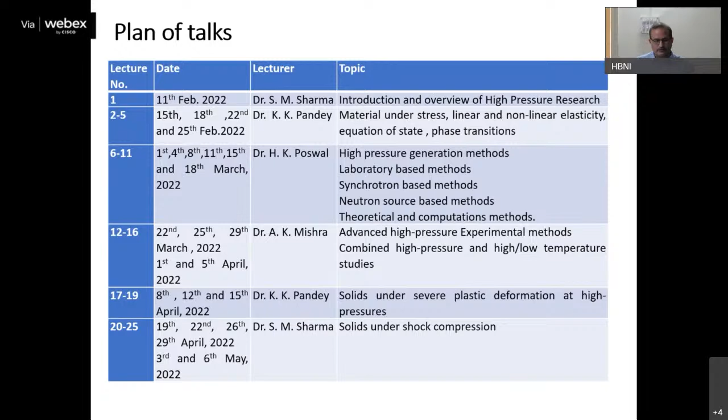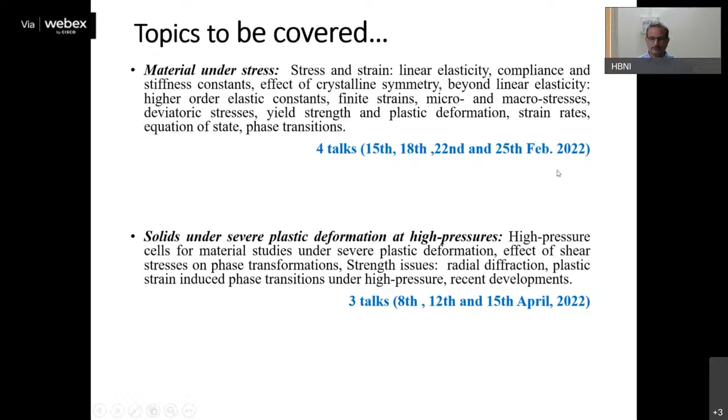So the topics that I will be covering, basically, will first be the basics about material under stress. In this, I will introduce what is stress strain tensor, what is pressure in solids. I will talk about linear elasticity, compliance and stiffness constants, and the effect of crystalline symmetry on this compliance and stiffness constants matrix. Then I will talk about nonlinear elasticity, equation of state, and phase transformations. In my second part of the talks, I will cover solids under severe plastic deformations at high pressures. Today's talk will be up to nonlinear elasticity.

I will keep my talk at a very elementary and basic level for the benefit of young researchers. So I will start with the definition of pressure in fluids, and then what happens when we go to solid systems - what is deformation in solids, what is linear elasticity, then define stress and strain tensors. Then I will talk about stiffness and compliance matrix, the effect of crystalline symmetry, and then how to get information about pressure from the stress tensor, and a little introduction about plastic deformation, which will be discussed in more detail in the second part of my talks. Finally, I will give a brief introduction to nonlinear elasticity. Of course, this nonlinear elasticity is a subject in itself, very broad, so I will just cover some introduction.

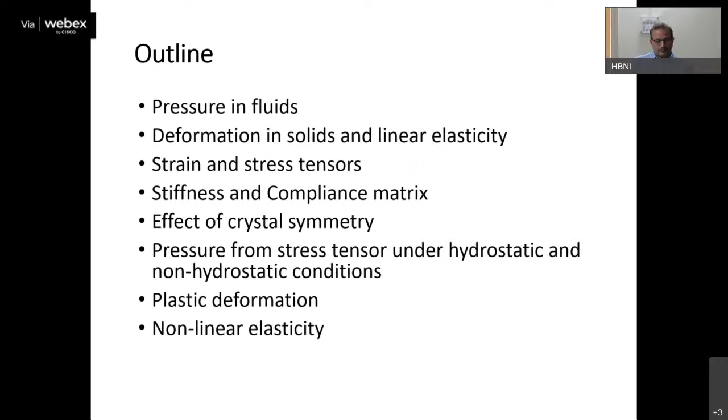Okay, let us come first to pressure - how pressure in fluids is defined. We have been learning from very elementary levels that pressure is defined as force per unit area. So how does this definition come into picture? Actually, this comes into picture from fluids or gases, basically. If you go to the microscopic level understanding of fluids, you can consider the microscopic.

There are many microscopic entities in the gas - atoms or molecules - and they are basically constantly colliding at the surface of the container, imparting some momentum, so basically transferring momentum all the time. It is momentum transfer to the walls of the container divided by the area of the container walls. So this is how pressure is defined. And here, if you notice, I have put N here, which means all these forces are basically normal to the surface, because in the case of fluids, there are no shear stresses, as it does not have any shear strength. That's why the basic definition of pressure comes from fluids.

And this is something which is also used commonly in hydraulic presses, where we can apply small force and use fluids to basically magnify the force by increasing the area. Now, what happens in the case of solids? If I take a fluid, at all temperatures there will be some pressure. I have to go to either 0 K, or I have to increase the volume to infinity in order to make pressure 0.

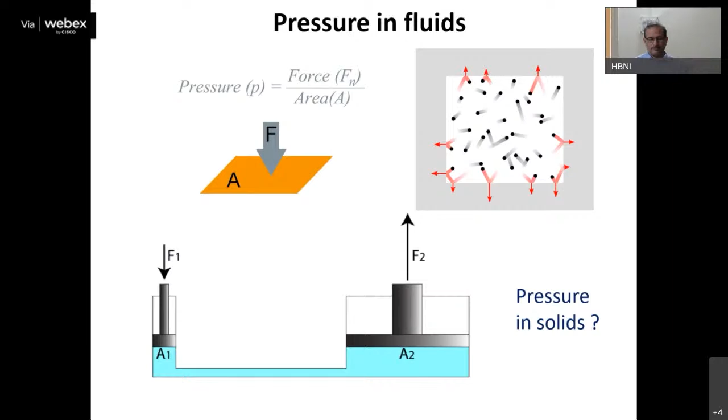In the case of solids, there are interactions between the microscopic entities, which can be molecules or atoms. Because of this interaction, there is some mean position about which the system is in equilibrium. We can understand this by a spring model, basically.

Just consider a spring and a mass attached to a spring. When it is in equilibrium condition and you apply no force, the system is static, it does not change position. But as soon as you apply force on this mass and compress or elongate the spring, there is some restoring force that tries to bring the mass back to the equilibrium position. This is something similar to what happens in case of solids also.

This is a 2D representation of a solid lattice, where you can consider all these atoms connected by springs. You can imagine a 3D network also, similar to this 2D network, where all atoms are sitting at some fixed positions, which are connected by springs. So at any time, they are at equilibrium position.

Actually, at any time, there is some temperature also. So ideally, these atoms are not sitting just at their equilibrium position. They are actually vibrating about the mean position. But these vibrations are very small.

So the potential faced by each atom can be described by this kind of curve, which has a very steep rise as you go below the equilibrium distance, and it again increases if you go above the equilibrium distance. This is the equilibrium distance, and at the equilibrium distance, you can approximate this potential as harmonic potential.

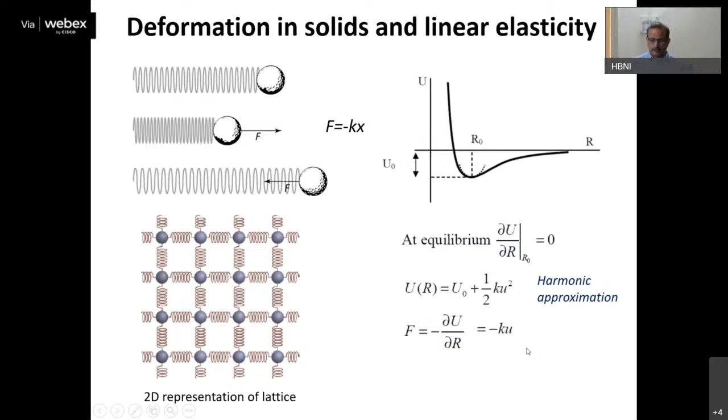Now, in case of solids, it is not only the normal force which acts on the surface, but because solids also have some shear strength, even if you apply tangential force, it also has a response. So now instead of expressing this displacement as a scalar or vector quantity, you need a tensor quantity to describe these displacements.

For example, if you have some body in space, and if you want to deform it, you need to apply some external mechanical force on this body. As soon as you apply this external force, there is some response force from within the material that tries to oppose whatever external force you applied. But before reaching equilibrium, it also deforms.

So there are some strains developed in the system and some stresses developed. Strain and stress are basically tensor quantities, and they evolve in the system as you work on it by some external means. This is a representation of the strain tensor. You can see there will be 9 components in this tensor because we are in a 3-dimensional space.

By convention, this tensor is defined such that the first index corresponds to the direction normal to the surface, and the second index corresponds to the direction of the displacement in case of the strain tensor.

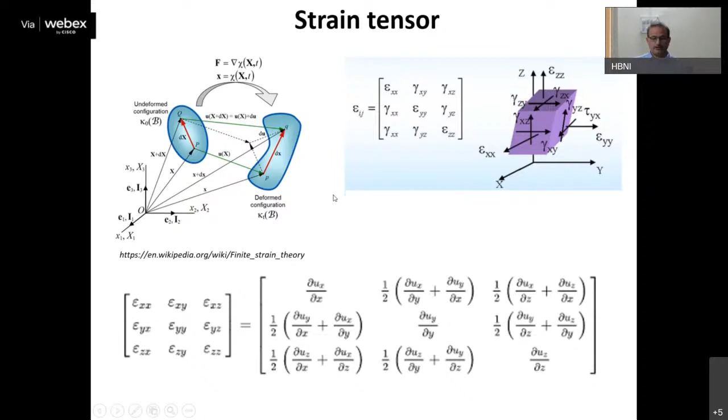Similar to the strain tensor, there is a stress tensor that evolves in the system, which opposes the external applied force. Like the strain tensor, the stress tensor is also a field described all over the sample. You can consider a small volume element, and the convention is the same: the first index describes the orientation of the surface, meaning the normal direction to the surface, and the second index corresponds to the direction of the force.

If I and J are the same, these are the diagonal components, corresponding to the normal stresses on the surface of the volume element. The off-diagonal elements correspond to the shear stresses. For example, sigma xy means the normal of the plane is in the x direction, and the force is acting in the y direction.

You can define all these stress components by these relations, where delta Fx is the force on the surface and delta Ax is the area of the surface, taking the limit where the area tends to zero. But the volume of this element should still be such that the system represents a continuum.

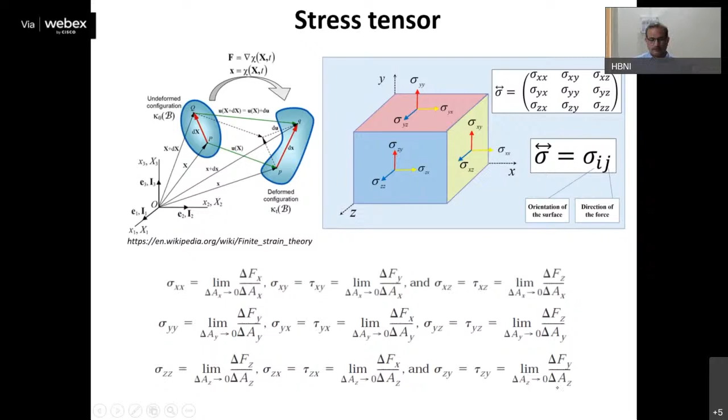Now let us talk about the symmetry of the stress and strain tensors. As I mentioned, we are interested in studying the deformation of the system, and this necessitates that the off-diagonal elements should be equal.

For example, if you take a two-dimensional cross-section of the surface and compare the stress components sigma xy and sigma yx, they act in this way and must be equal. If they are not equal, the volume element will rotate, corresponding to a change in angular momentum. So to conserve angular momentum, avoid rotation, and purely describe the deformation of the system, these components have to be equal.

So what does this mean? Instead of 9 components, now there are only 6 components: 3 diagonal components and 3 off-diagonal components.

In the same way, the elastic strain is expressed like this, where u is the displacement and x is the coordinates in the deformed configuration. This is how the elastic strain components are related to this deformation.

Here again, in order to describe only the deformation and not the rotation, this has to be symmetric. From this relation itself, you can see it is defined in such a way that it is symmetric. So like the stress tensor, the strain tensor is also symmetric — only 6 components for the stress tensor and 6 components for the strain tensor.

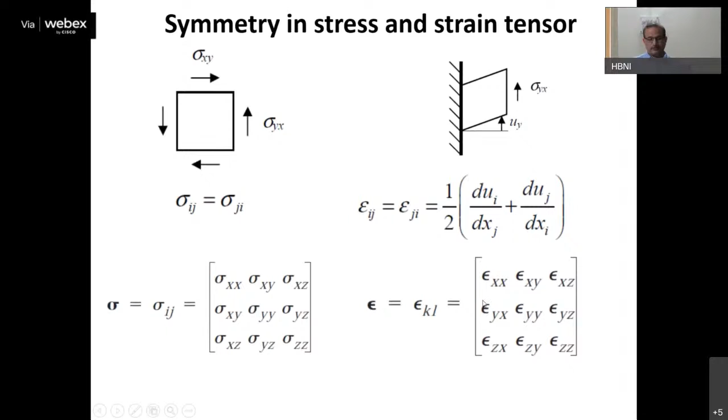Now let's come to the relationship between the stress tensor and strain tensor. As I mentioned, we are talking about linear elasticity, where we are very close to the harmonic approximation, and the deformations are very small. So the stress and strain tensors are linearly related, connected by some constants that we call elastic constants.

The stress tensor is a second rank tensor, and so is the strain tensor. So the elastic constant becomes a fourth rank tensor, and the total number of components in this tensor should be 81.

But now let us invoke the symmetry considerations of the stress and strain tensors. As mentioned, there are 6 independent stress components and strain components. So instead of writing in matrix form, we can describe stress and strain as vectors — these are the 6 independent components of the stress tensor, and these are the 6 independent components of the strain tensor, written by convention in this order.

First you take all 3 diagonal components, then you go this way: sigma yz, then sigma xz, and sigma xy. This is how it is expressed, and in the same way you also express the strain tensor.

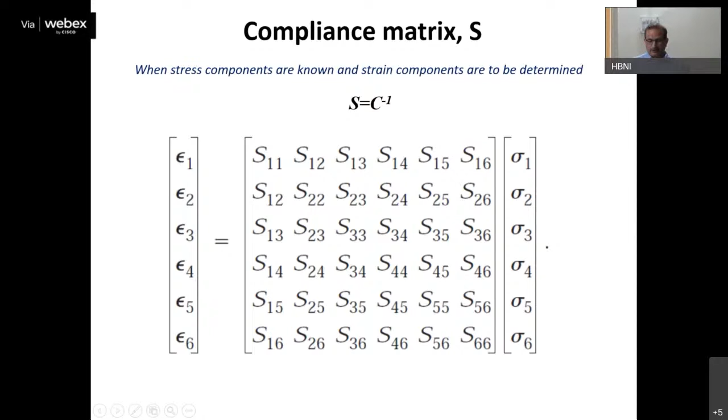Now let us talk about the symmetry effect of crystalline symmetry on this stiffness matrix. For example, let us take the cubic system. As we know, in a cubic system, it is symmetric in all x, y, and z directions. So the response of the material should be the same along x, y, and z. So all these components have to be same. Again, because it is symmetric, all the shear components, the response in the shear direction will also be same. So all these three, because this is symmetric, can be represented by the same elastic constants.

One thing I missed in the stiffness matrix: if you divide this matrix into 4 parts, this upper corner part basically relates only the normal stresses to the normal strains, so this part corresponds to only compression. Whereas this part relates the shear stresses to shear strains, so this part relates to only shear elastic constants. This part and this part relate the shear stresses to normal strains, or normal stresses to shear strain, so this part corresponds to the mixed state where there is a coupling between compression and shear.

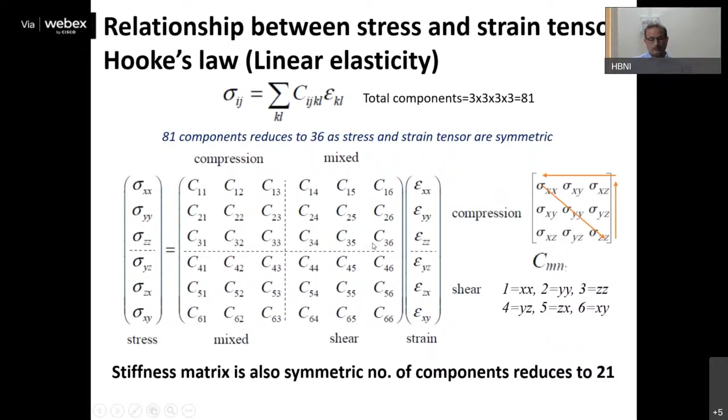We encounter this situation where this will be non-zero only when the system has some non-orthogonality. In the case of the cubic system, because there is no coupling between shear components and normal components, all these components are zero. And in the same way, invoking the symmetry of the system, all the shear components also have to be same. So overall, there are only 3 independent elastic constants which describe the cubic crystalline system.

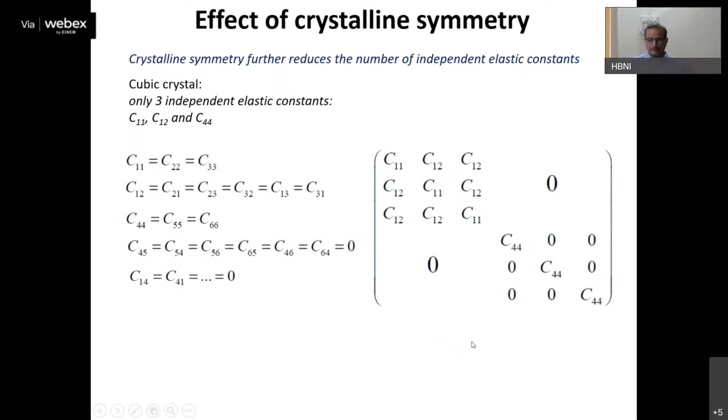Now let us talk about other systems. As you go on reducing the symmetry of the system, the number of elastic constants will increase. A more symmetric case is the isotropic system, for example glasses, which is even more symmetric than cubic. In this case, you have only 2 elastic constants. In case of cubic, as described earlier, you have 3 elastic constants. When you go to the hexagonal phase, based on symmetry considerations, you have only 5 elastic constants. For the tetragonal phase, you have 6 elastic constants. For the trigonal phase, depending on the point group symmetry, you can have either 6 or 7 elastic constants. For the orthorhombic case, you have 9 elastic constants. For monoclinic, it's 13. And for triclinic, it is 21, which is the maximum possible number of elastic constants.

This is nicely depicted in these pictures. The blue circles correspond to non-zero components, and those blue dots, if connected by a line, means they are all equal. These cross-mark components are basically related to other elastic constants. So this describes the effect of symmetry on the stiffness matrix.

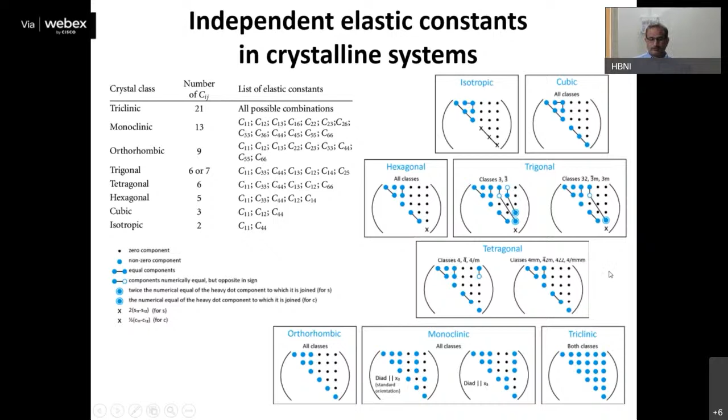Now let us come to our main topic, that is pressure. How do we know about pressure from this stress tensor? When can we say there is some pressure on the system?

We can call it pressure on the system when we put a sample in some hydrostatic environment. What happens in this case? Because the shear stresses of this environment are zero, you don't have any off-diagonal component, and all the components which are normal to the sample are all equal. So basically this describes the pressure. What is pressure? Pressure is nothing but a particular stress state of the stress tensor in which all the diagonal components are equal. And that is how pressure is defined, as 1/3 of the trace of the stress tensor. You know that the trace of a stress tensor is invariant. So this describes the pressure.

That's why in most high pressure experiments, where we want to study material under pressure, we put the sample in some hydrostatic environment, and this chamber is enclosed in some metallic gasket, and you compress this chamber using some anvil. If you want to do in situ studies, these anvils have to be transparent for whatever probe you use, for example X-rays, or for optical spectroscopy like Raman or infrared. So diamond anvils are used, which are basically transparent to these probes. You also put some pressure marker, which has a response well calibrated with pressure. We assume here that whatever pressure is experienced by the sample is the same as the pressure experienced by this pressure calibrant.

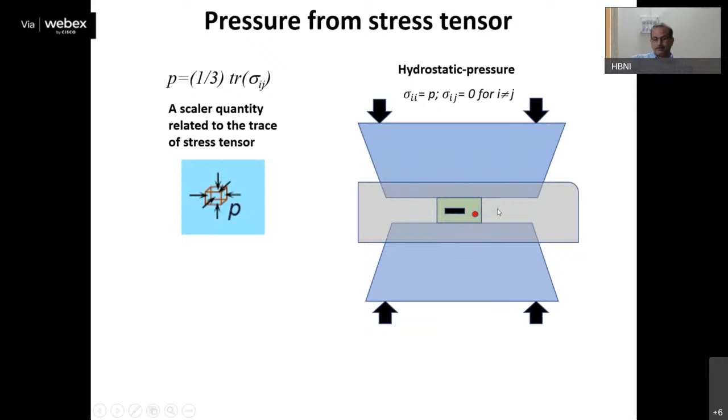So the question is whether this pressure in the sample is really scalar, or basically is it uniform throughout all the sample? The answer is no, because many a time your sample need not be single crystal. It can be a polycrystalline system.

It can be a polycrystalline system made up of many grains, and there may be different orientations of these grains. There may be defects in these grains.

So even when you are applying pressure on this sample, meaning all the normal components are equal, if you try to describe the stress states within the sample, they may not be completely hydrostatic.

Because here your grains are basically touching other grains, there are interfaces. So the stress state here will be quite different from the stress state at the boundary of the sample. So even in hydrostatic conditions, there is a possibility of heterogeneous stresses in the sample.

So, but then does it mean that all high pressure experiments are not truly hydrostatic? The answer is yes, but practically it is no.

Why? Because under hydrostatic conditions, the difference between these normal stress components is very, very small. So to an approximation, you can consider the situation in the cell as hydrostatic.

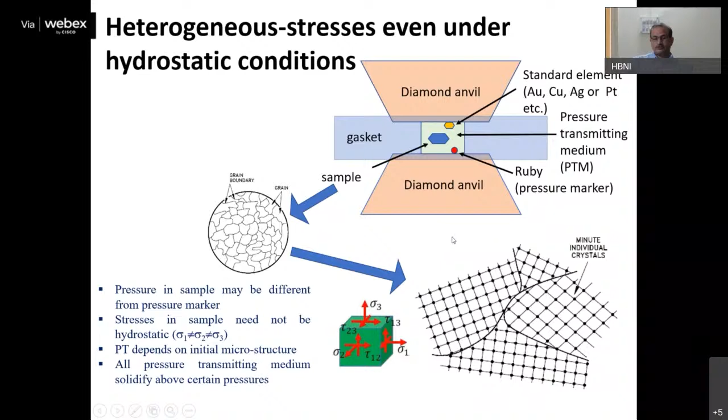So many a time in hydrostatic conditions, even there are macro strain heterogeneities. So within our cell, it may not necessarily be an equal stress state all over the cell. There can be macro stress heterogeneities.

So sometimes if your probe size, like the size of your X-ray beam, is large enough that it cannot distinguish these macro strain heterogeneities, you can confuse it with micro strains.

So that's why it is very important to select the proper size of the beam depending on the heterogeneities within the sample that you want to probe.

Okay, now let us come to the non-hydrostatic conditions. So what is a non-hydrostatic condition? Basically earlier in that case, we used some hydrostatic environment around the sample, which was the liquid, which has zero shear strength. But now we are not using any liquid.

We just put the sample inside the chamber. In this case, definitely there will be some stresses which cannot be described as hydrostatic stresses.

So you can easily bifurcate this stress tensor into two terms. One is the mean stress, and the other is the remaining part of this stress tensor, like this.

So here mean stress basically represents pressure only, because this is the mean of these three diagonal components. And if you remember, we have defined pressure as 1/3 of the trace, which is nothing but the mean of these components.

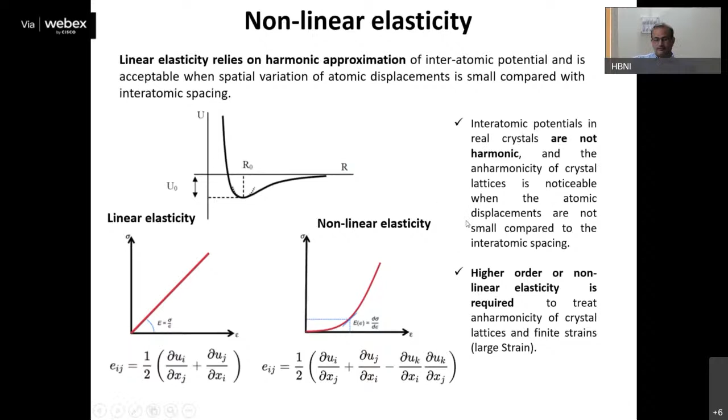So I will not go into much detail of higher order elasticity, but just to define what higher order elasticity is: you know that elastic constants are nothing but the derivative of the internal energy or free energy with respect to the strain. And depending on the order of this derivative, you can define this elastic constant.

So if the order is second order, it is still a linear elasticity, because the potential energy, as I told earlier, depends on the square of the deformation. So if you take the second order, it is still linear elasticity. But if you take the higher order derivative, then it is a non-linear elasticity. You will have several more components in the elastic constants.

So this is the definition of elastic constant in case of adiabatic compression, or this is in case of isothermal compression. And if you use this term in terms of the Taylor expansion of this free energy, as you slightly deform it, because your free energy is a function of your deformation, you can get these various components. So depending on how nicely you want to describe the system, you need to invoke higher order elasticity terms.